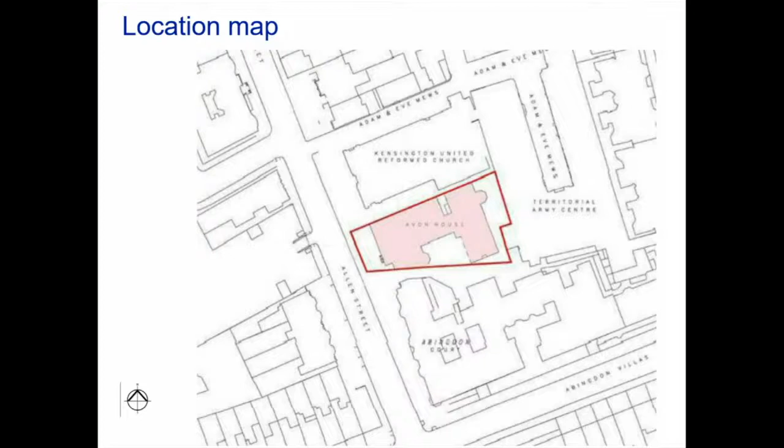To the north of Avon House is the Grade 2 Kensington United Reformed Church. This has residential properties to the rear, known as 16 Allen Street, which overlook the site. Moving round to the east of the site are the residential properties of 26 and 28 Adam and Eve Mews, and the rear of the Territorial Army Building Centre, accessed from Iverna Gardens. And to the south of Avon House is Abingdon Court, which overlooks the site.

This photograph shows the existing front elevation of the building that was built in the 1970s. It is a simple, rendered design that does not reflect the character of the surrounding properties. You will note that there is a setback from the street and that the area to the frontage is used for parking with no boundary treatment.

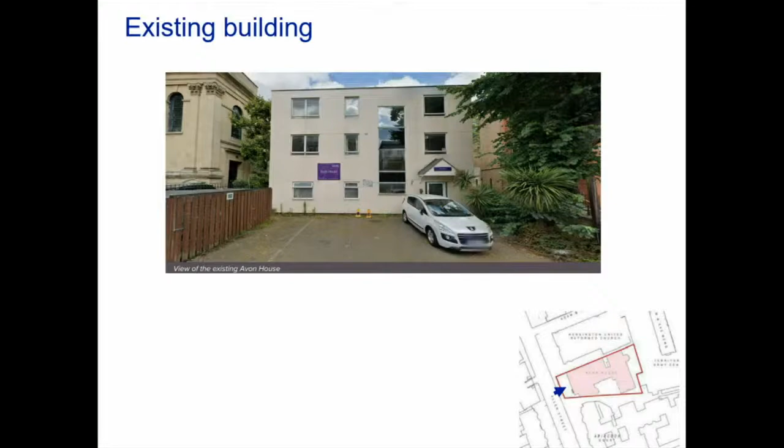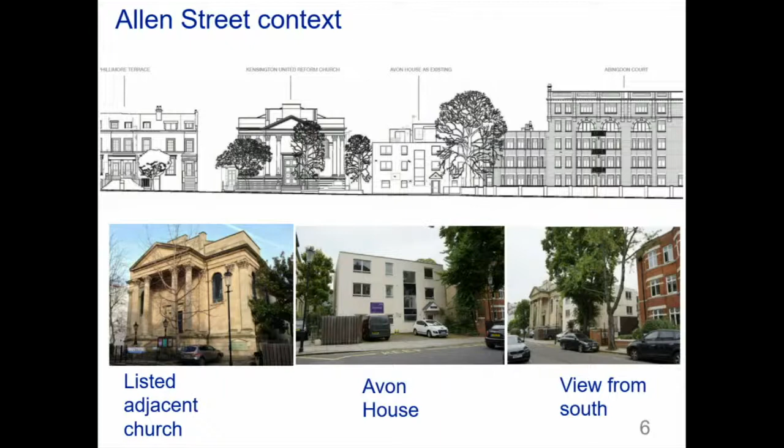This drawing shows the existing building in its context. The existing building has a basement level, ground, first and second floors. You will note that the existing building is lower than the height of the surrounding buildings.

In this photograph, you can see the existing Avon House looking from the north of Allen Street, showing the relationship of the existing building with the listed church, which dates from 1854. You will note the grand elevation of the church with portico and columns. And this photograph also shows the large tree in the grounds of Abingdon Court, along with trees beside the church and Avon House, which would be retained in the proposal.

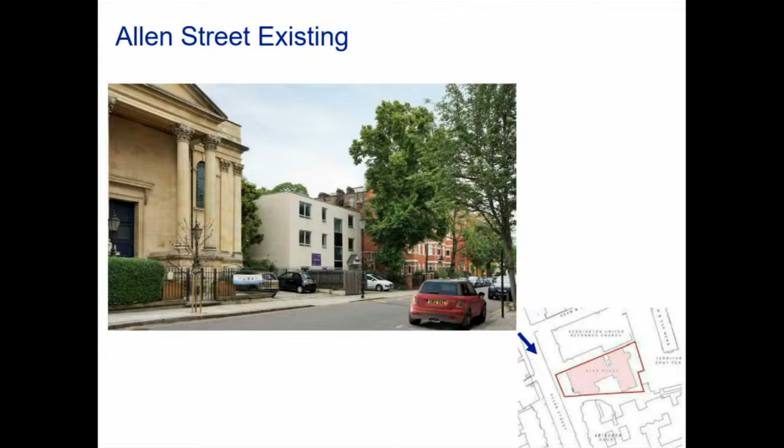This is also shown looking from the other direction, from the south of Abingdon Court. You can see there views through to the Tree of Heaven.

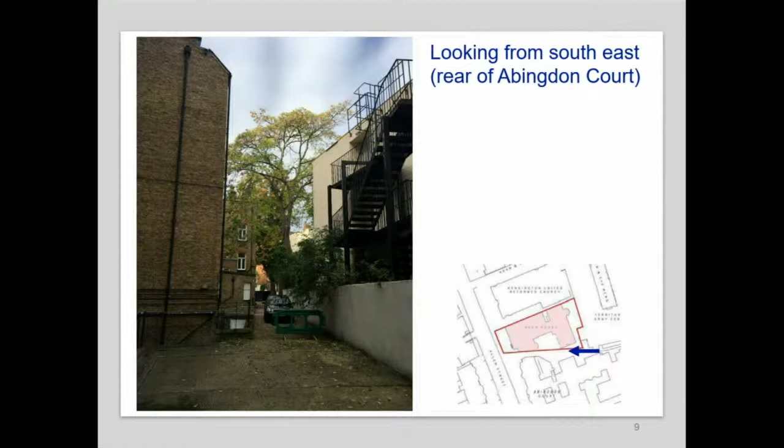This photograph shows a view from one of the flats of Abingdon Court, looking onto the site to the southern courtyard of Avon House.

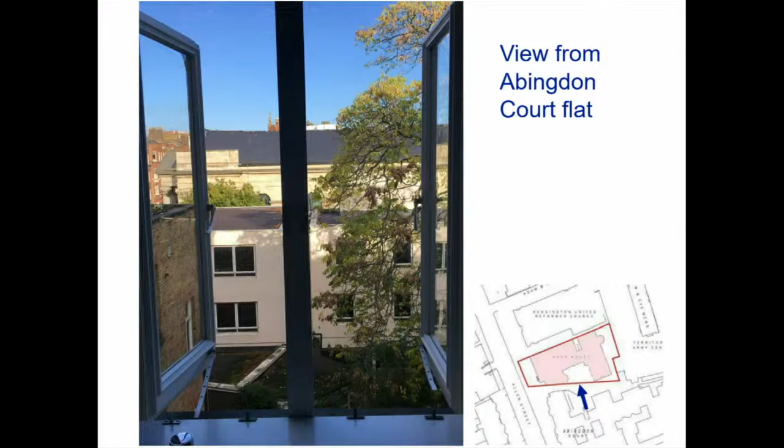Moving round to the rear of the site, this is the rear area. There is a high brick wall to the Territorial Army building and the properties within Adam and Eve Mews, and these properties have a roof terrace which fronts onto the site.

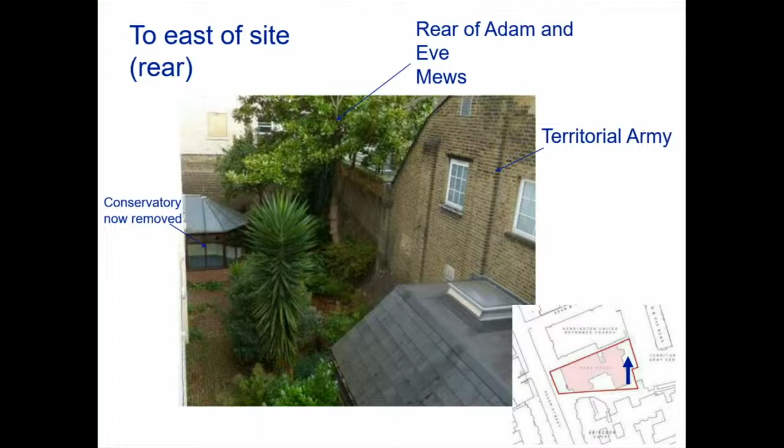Moving round to the north of the site, this is the residential property of 16 Allen Street, to the rear of the church, which has windows facing onto Avon House and a terrace at first floor level.

And then finally, this photograph shows the relationship between the side elevation of the church and the side elevation of Avon House.

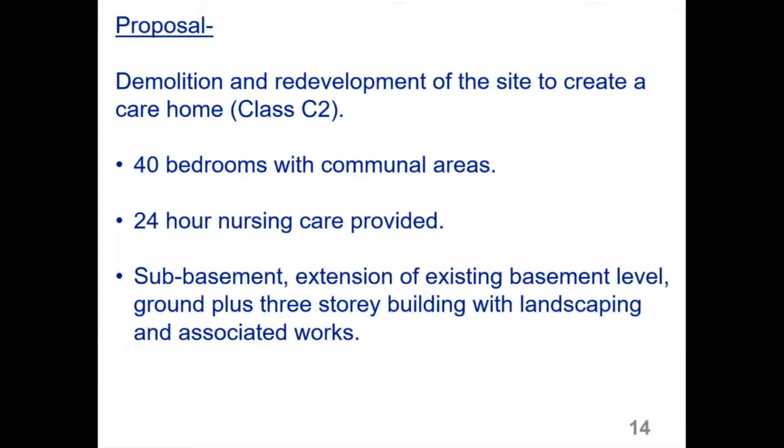The proposal under consideration tonight is the demolition of the existing care home to create a 40-bedroom home. It would have communal facilities and provide nursing and end-of-life care to older people with a range of needs, including dementia. The new building would have a sub-basement, basement floor, ground floor and 3 upper floors, with plant located on the 3rd floor.

As set out within the officer's report, committee members should be aware of a 2016 permission for a 24-bedroom neurological facility, which included 2 basement levels. This permission has been implemented and so can be built out.

Permission was then refused for a scheme for a care home in September 2020. The reason for refusal was that the scale and form of the building would have a significant impact upon the living conditions of surrounding properties, in particular 16 Allen Street, by reason of loss of daylight and increased sense of enclosure.

It should be noted that the previous scheme included the removal of the Tree of Heaven, but this was not a specific reason for refusal.

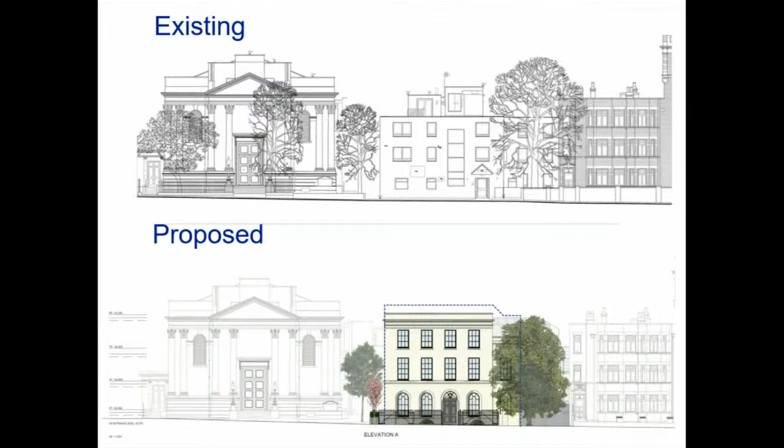The new building would maintain the setback to the street with a welcome new boundary and railings, improving the appearance of the forecourt. In terms of height, the new building would appear as 1 story higher than the existing building, with the new parapet height sitting no higher than the cornice level of the church portico.

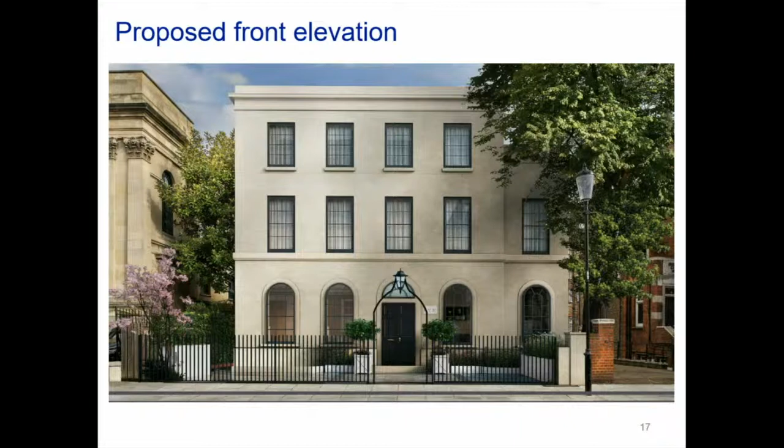The front elevation would be of a simple classical style with stucco render and timber sash windows to respect the dominance of the listed church. The building would have a side wing that would be set back slightly from the main front elevation, which is also illustrated in these visuals here.

In terms of height, the proposed new building would have an additional floor of accommodation at third floor level. For the most part, the building would comprise 2 basement floors, a ground floor level and 3 floors above, with the ground floor to the rear part of the building partially set below pavement level. The front part of the building to Allen Street would have a double height ground floor at street level and then 2 floors above.

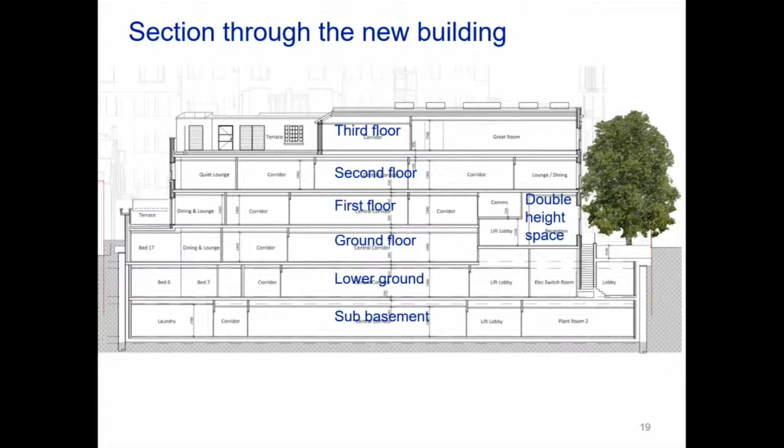The proposal would retain some ground level to the south of the lightwell for planting, and 2 silver birch trees are proposed.

At lower ground floor level, there would be the main courtyard. This would have bedrooms fronting onto it, with other bedrooms looking onto the landscaped flat roof to the rear.

There is an existing basement level to the existing building, and this proposed basement would be an extension of this existing basement floor.

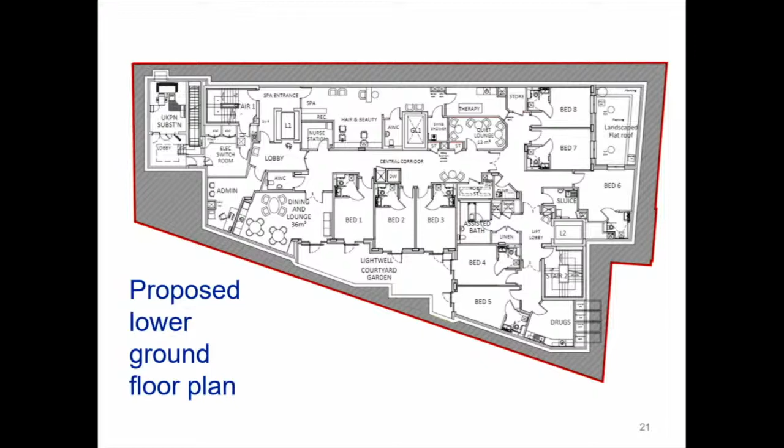The lower basement beneath this would be one additional level of basement compared to the existing, and this would contain plant and equipment along with the kitchen and ancillary facilities.

Moving up to the first floor, there's proposed to be a terrace to the rear, and also there would be flat roofs which would be planted and non-accessible.

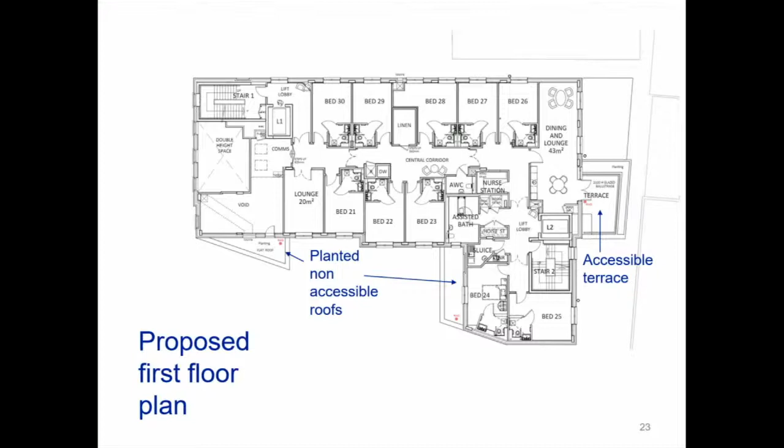At second floor level, there would be more bedrooms and communal space.

And then moving up to third floor level, this would be set back on the southern elevation and would contain the main communal lounge along with plant and equipment.

This plant and equipment would be fully enclosed within the third floor space, and the plant would be subject to a recommended condition to ensure that there would not be any noise nuisance to the occupiers of neighbouring properties. The Council's Environmental Health Officer is satisfied that the plant would not be audible.

And this level also does contain the main accessible external roof space, which is shown by the circle on the diagram there.

Apart from part of the main third floor roof and the first floor terrace, the other flat roofs to the building would be non-accessible planted roofs designed to enhance biodiversity, including tree planting in pots, climbing plants and bird boxes.

PV panels would be placed on the main roof level. The proposal includes sustainable urban drainage measures in the form of blue and green roofs, which would ensure flooding risk would not be increased as a result of the proposal, since runoff rates on the site would be reduced. The proposal would also comply with other environmental standards, including a reduction in carbon emissions on site, as set out within the officer's report.

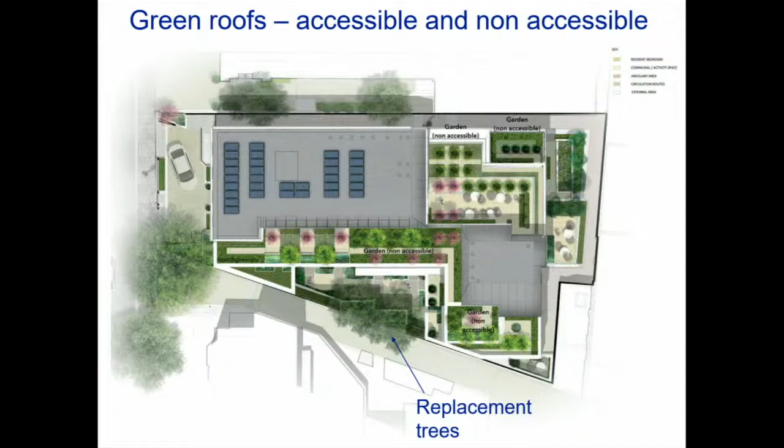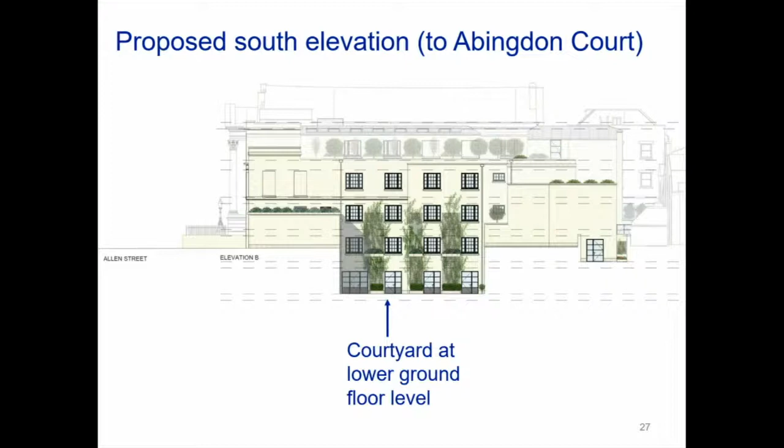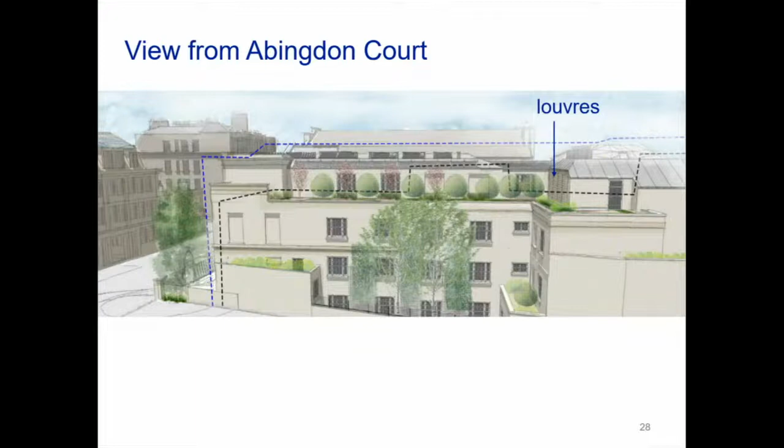The stepped profile and these louvres are the main elements of the design viewed as a compromise that would result in less than substantial harm to the character and appearance of the conservation area. This has come about as a result of the need to ensure that the functional requirements of the building as a care home are met, including the intensive need for plant and equipment, along with maintaining light levels to neighbours.

The proposed rear elevation, fronting onto Adam and Eve Mews, would be largely hidden from views. There would be the roof terrace at first floor level with screens to that first floor terrace and the upper roof terrace.

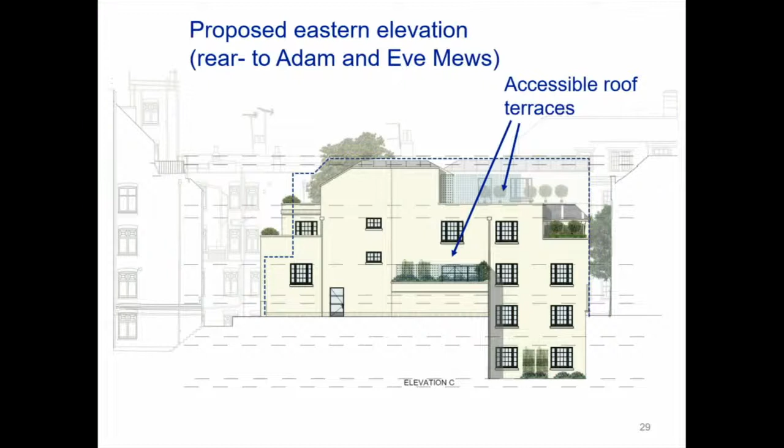This is the elevation fronting onto 16 Allen Street and the church. This includes further louvres to the plant at third floor level on this side elevation. These would be set back from the street to reduce their visibility, but are likely to be glimpsed in some views from Allen Street. The building is also set down at the rear opposite 16 Allen Street.

The reduction in massing of the building has been to address the reason for refusal of the 2020 scheme, which related to loss of light and increased sense of enclosure.

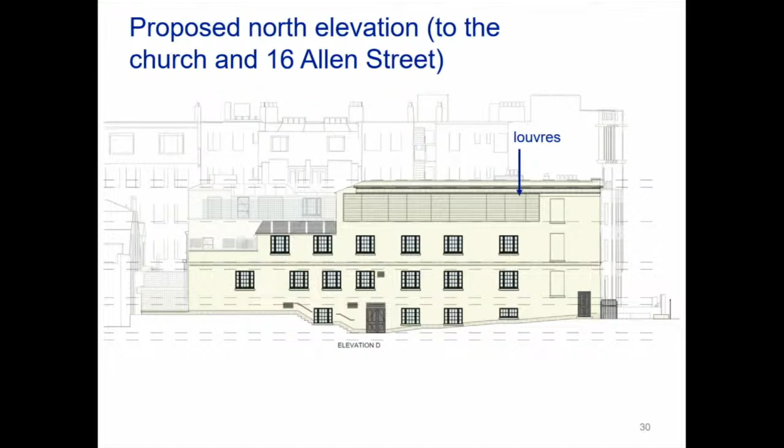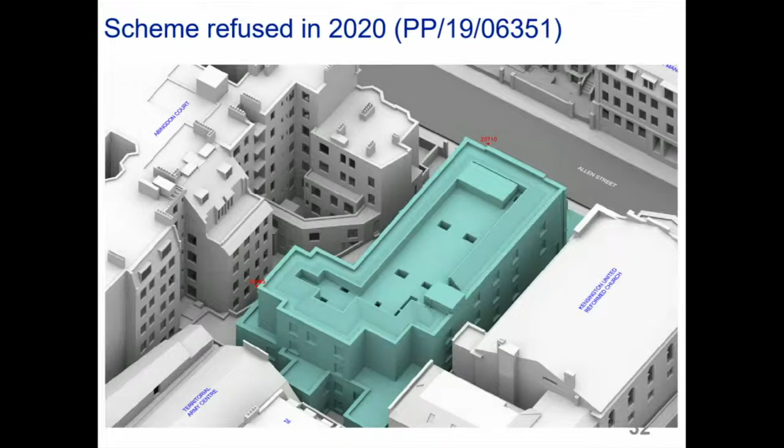You'll see that the setback has been increased in this currently proposed scheme, along with a stepped profile on the southern elevation to Abingdon Court.

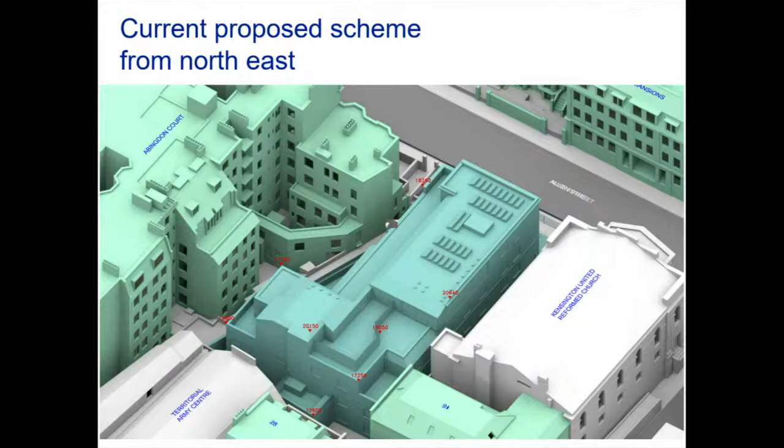As a result of this change in massing, the scheme would now comply with BRE guidelines on sunlight and daylight, and would ensure there would be no harmful increase in the sense of enclosure to nearby residents.

It is therefore considered that the previous reason for refusal relating to light and enclosure has been addressed, but it is important to note that this is a new scheme, and in coming to a decision, members need to undertake the balancing exercise laid out in the summary section of the report.

I do not intend to repeat that in detail now, but in brief, consideration needs to be given to the test set out within the National Planning Policy Framework, the NPPF, in balancing harm to designated heritage assets with public benefits.

Less than substantial harm resulting from the proposals has been identified to the character and appearance of the Edwardes Square, Scarsdale and Abingdon Conservation Area, and the significance of the neighbouring Grade 2 listed church through the impact upon its setting.

But this less than substantial harm needs to be weighed up against the public benefits of the proposal: the reuse of this long-term vacant site, the purpose-built care home for the borough, the expansion of a social and community facility, new homes, and contributions to the local economy.

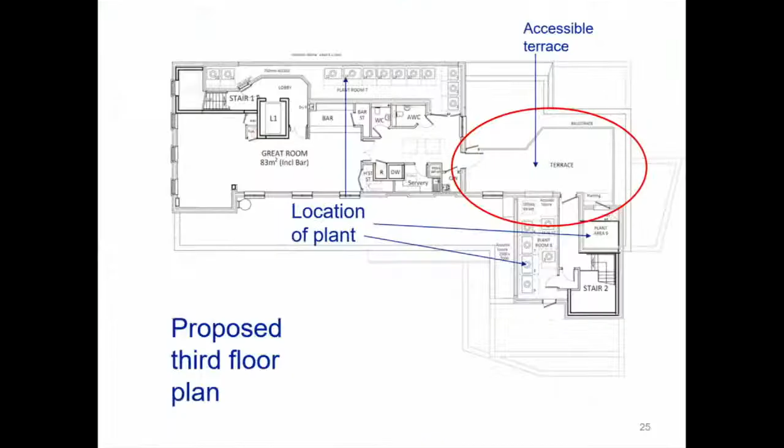Yes, absolutely. So the proposed building is in the exact same location as the existing building, so it's no further forward - it retains exactly the same position in the street frontage. In terms of the boundary to the front, there's a proposed railing that runs along the front boundary to Allen Street, to which there is gated access in and out for vehicle movement. Okay, so there is one, it's just the visual is slightly confusing. All right, thank you, that's all I needed to know.

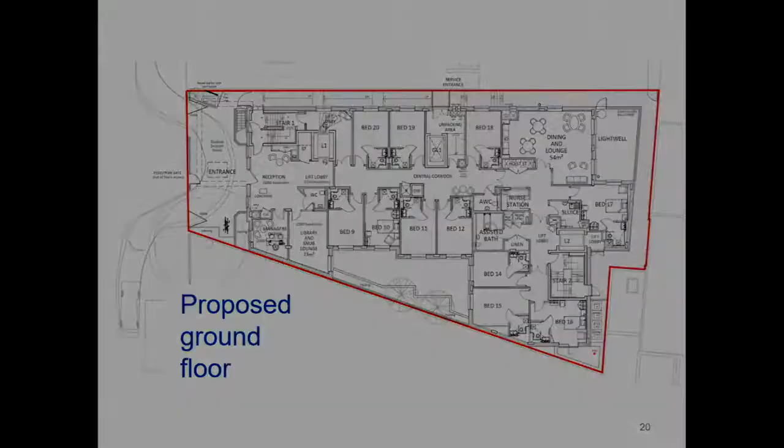Just going back to shared outside space, could you let me know the measurements of how much shared outside space there is, and also remind me how many residents will be in the home? Sure, there's 40 residents we're proposing in the home, and I think Mel's got the stats on the space. In total, including non-accessible space, there's 155 square metres of outside space. In terms of accessible space, I don't have the exact square meterage with me for the lower ground and the upper terrace. So accessible, you don't have the figure? Not with me today.

Okay, well that makes it hard to answer my second question, but my second question was around how many other homes KYN operate, and how the amount of outside space for this number of residents compares to those other homes. At present, Kyn have got one care home under construction due to open this year in Bickley, Bromley. We've got another one under construction due to open next year in Fulham, near Hurlingham. And then we've got a number in planning, so this would be, if successful, possibly the third, fourth or fifth scheme that we would operate.

Comparisons to other garden areas vary depending on the location. This is an urban site, but it has a considerable amount of garden space. The Bromley site is larger, in a more suburban environment. But compared to the London ones, this has got a very high level because we've been able to factor in the various accessible roof terraces. So you believe compared to typical London care homes, this has an above average amount of outside space? Yeah, this is in London - this is good. Okay, thank you.